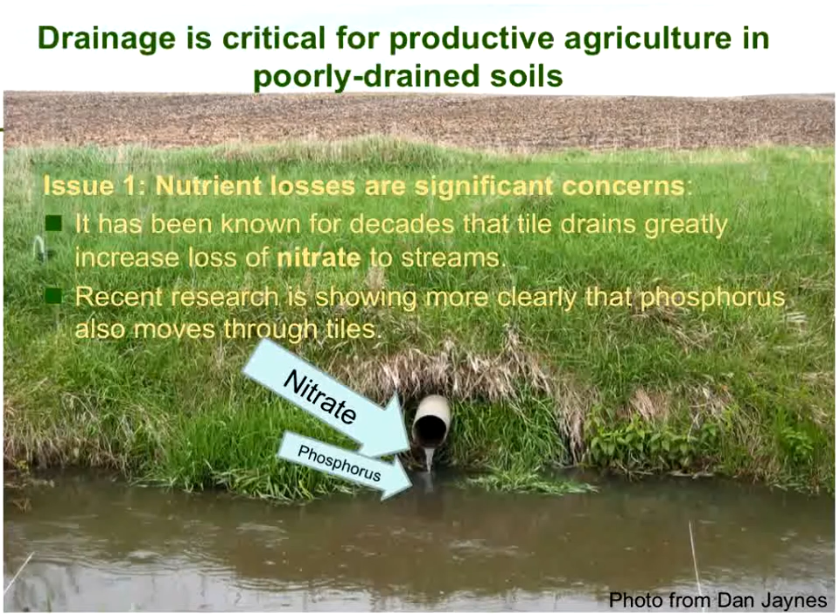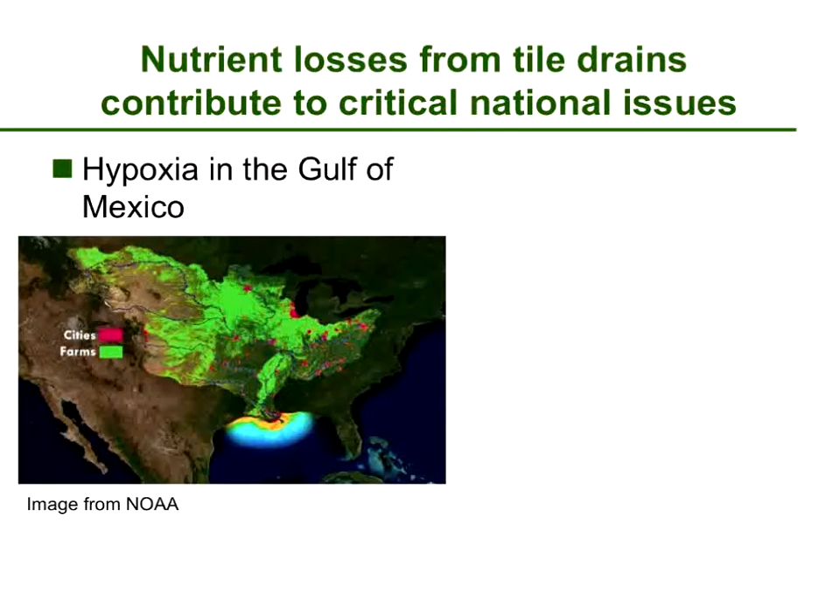More recently, the scale of phosphorus loading into tile drains has also become more widely understood. So now we really are talking about nutrients, both nitrate and phosphorus. These nutrient issues are important at the national scale, both hypoxia in the Gulf of Mexico, which is primarily a nitrate concern, although also phosphorus, and toxic algae in various lakes, but most recently in 2015, the terrible situation in Lake Erie in Toledo, where 500,000 people were without drinking water for a few days, I think shook a lot of people up and really got back to the need to really become serious about addressing phosphorus. Some portion, nobody knows for sure, but maybe something like 50%, goes through the tile drains.

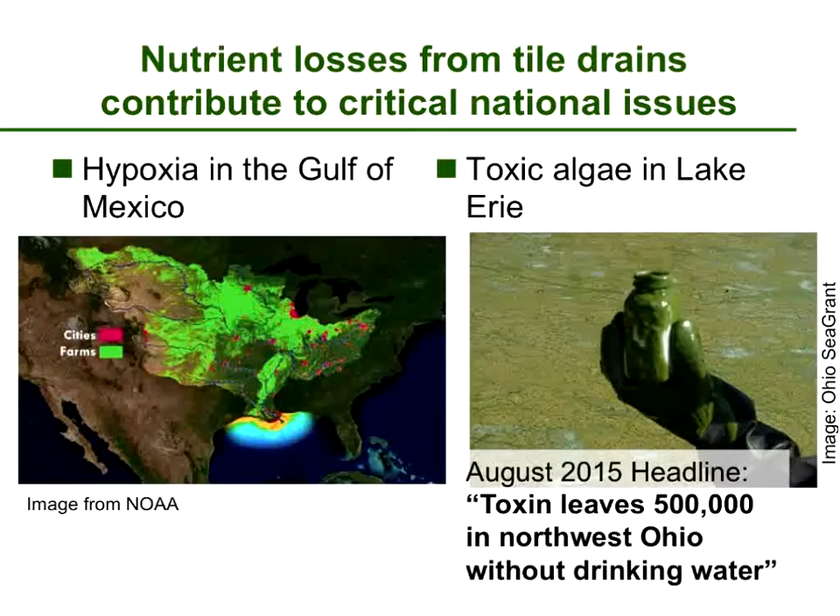Our project also addresses a second issue, which is not directly related to nutrients, which is that even in the relatively humid Midwest, crops often suffer from a lack of water. This was driven home in the drought of 2012, but water deficits occur nearly every year. And in response, irrigation has become more widespread throughout the region, even in places where irrigation has not typically been used.

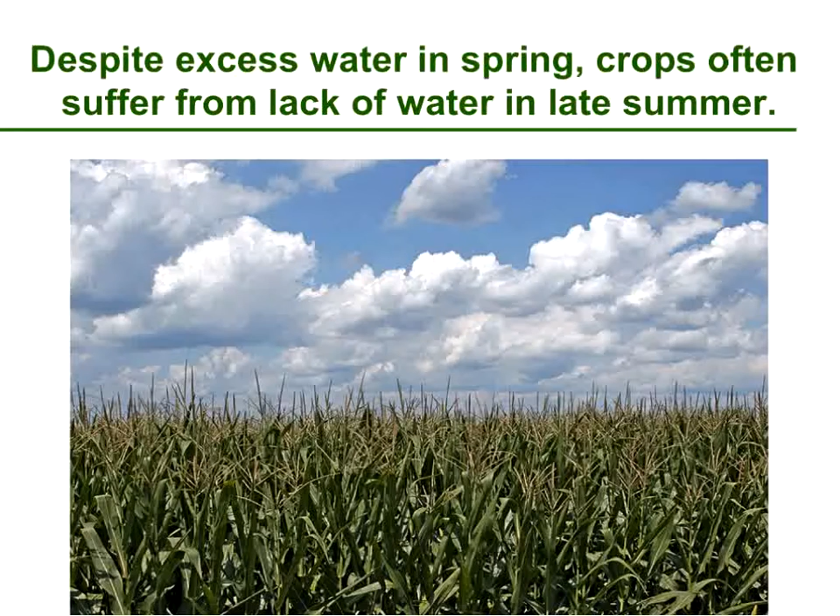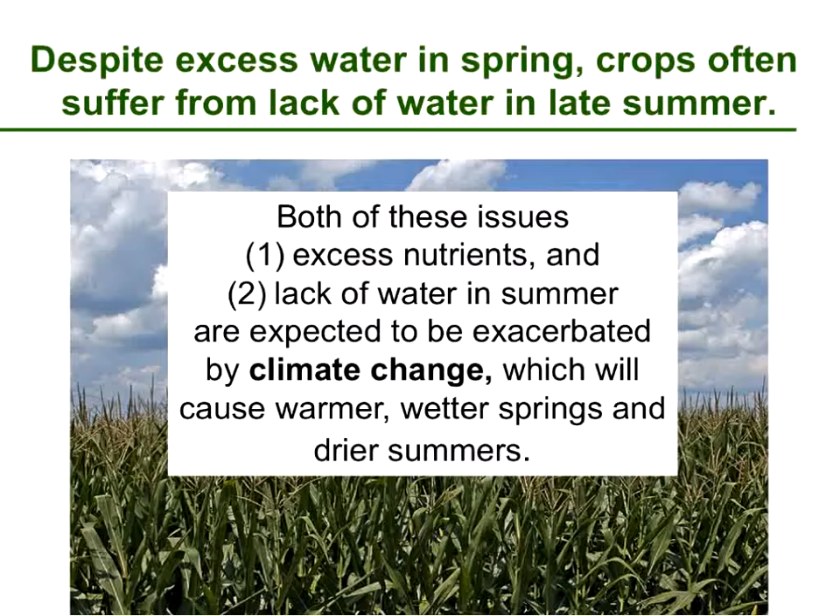Both of these issues, the excess nutrients that I talked about at the beginning and then the lack of water in summer, are expected to become worse through climate change. As we expect warmer and wetter springs, that will exacerbate the nutrient issues, and drier summers are also expected, which will exacerbate the crop water deficit.

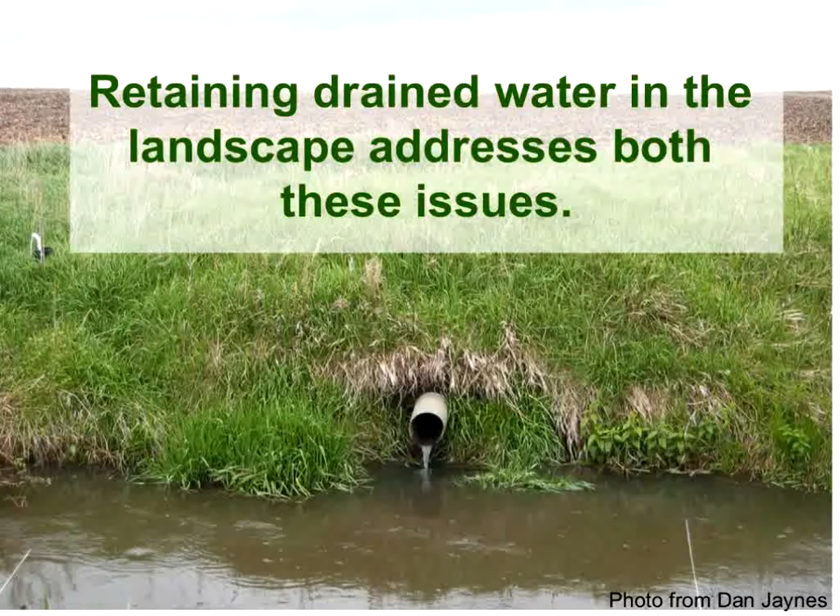So what we've been thinking about, and this group of researchers and extension folks from across the region, is the need to retain drained water in the landscape to address both of these issues. So the question is, where can you retain water in a typical field that looks like this? We've thought of a few places.

One practice is called drainage water management, and in this practice we actually retain the water in the soil of the field. I'm not going to go into it in detail because I believe Chris Hay will be talking more about some of the research that's gone on. So that's one possibility, retaining water in the soil.

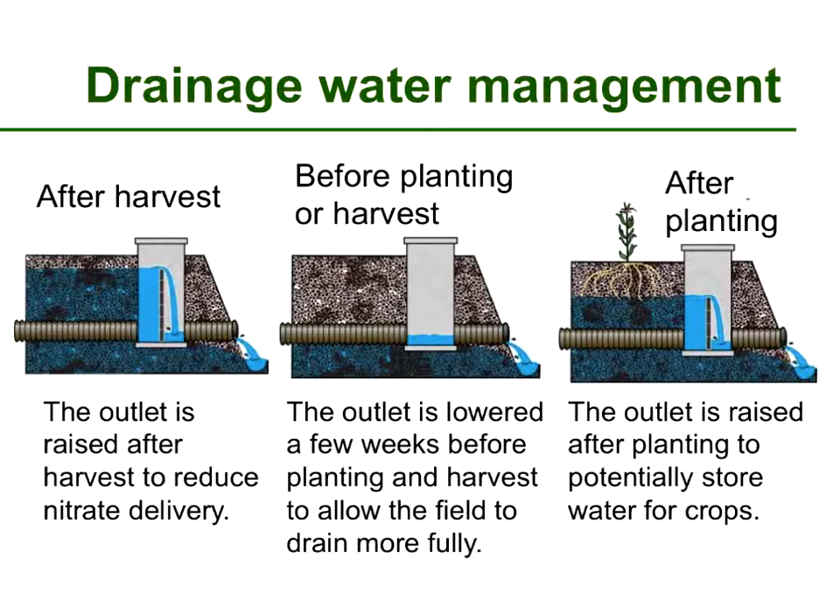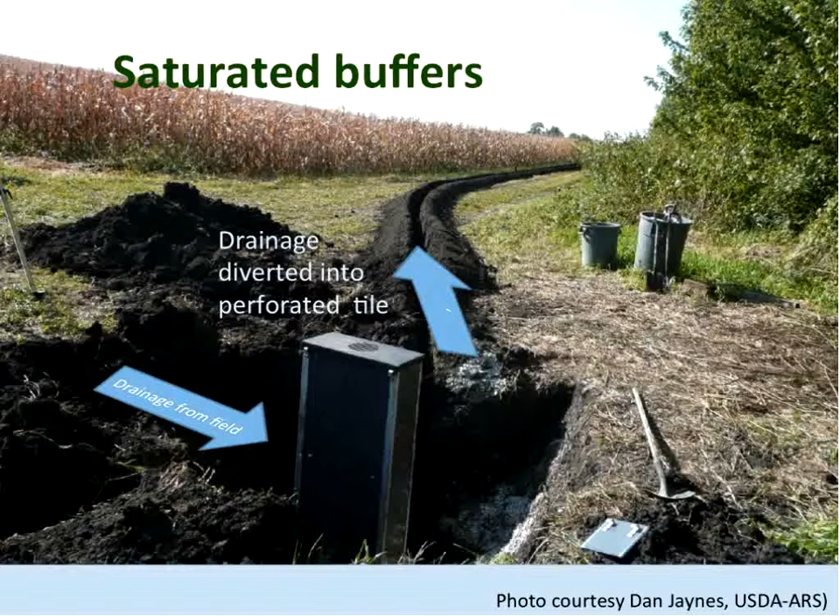Another is to retain water in the buffers, and there's a practice called saturated buffers, which is being researched across the region. So it retains water in the buffers.

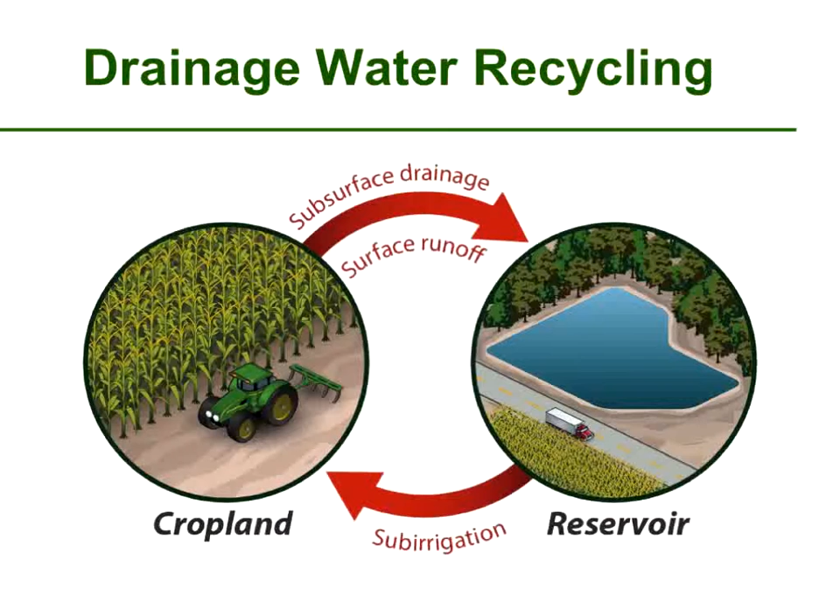And then the third practice, which is much less common and hasn't been studied as much, is what we're calling drainage water recycling. It also has a few other names. But the idea here is we have a pond or a reservoir, and the subsurface drainage and also the surface runoff are actually captured in the reservoir and then pumped back onto the cropland to be used by the crop later in the season. This is a great practice.

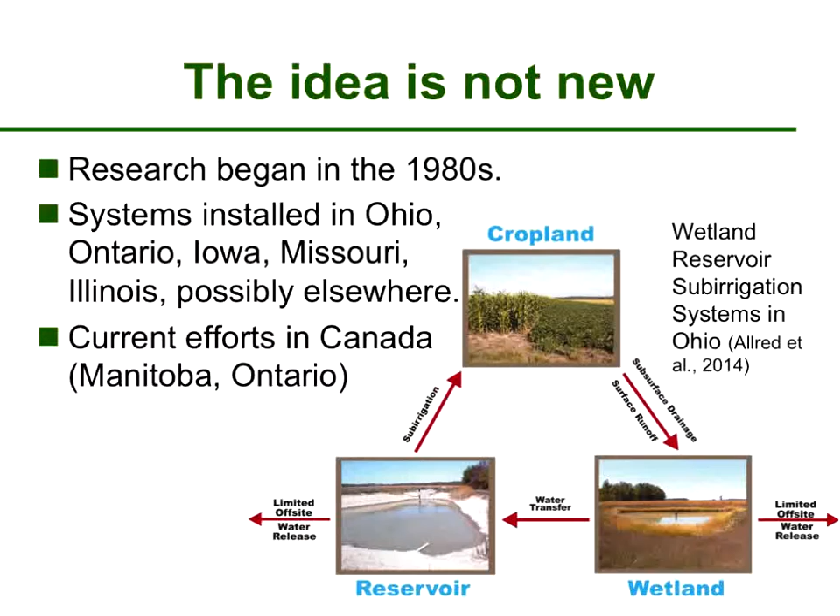It's not new. There's been research since the 1980s that have addressed that. The image there is of the wetland reservoir sub-irrigation systems that were put in Ohio in the 2000s, and there's been several papers that have published the crop benefits of those. There's also been systems in Ontario, Iowa, Missouri, Illinois, and folks in Canada are trying to do this. But those would be just one system. It really is not widespread at all.

But if these practices aren't new, one would likely say, well, what is new about this project? Although these practices have been evaluated in various locations across the region, what we're going to do in this large new project is try and bring the results together for improved decision making. The map here shows the research areas, the places where there are data, many of which have already been published, but we're going to put them in one large database, so that much more synthesis and recommendations can come out of them.

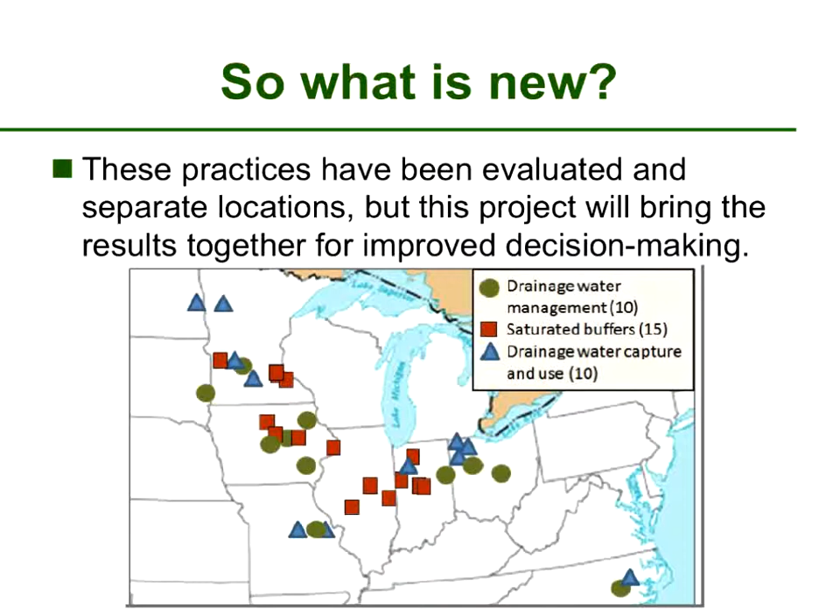So that's the big new effort that we'll be starting all across the region. It's a daunting task, but one reason we think we can do it is there's been another coordinated agricultural project going on for a little more than 4 years, called the Cropping Systems Coordinated Agricultural Project, or Sustainable Corn. Some of the data sets are already in the database, and it's taught us a lot about how to get large data sets together. So we're excited about doing more with this.

This is a diagram of what we hope to do in this project. I'll start on the left with Objective 2. We've got 30 field research sites, and out of those we'll do Objective 2, which is synthesis, working through the database. Objective 3 has a lot of modeling to extend the findings, and both of these will also look at the economics, since economic barriers are major barriers to getting these practices in place. Out of that, Objective 4 will be tools for decision making, and Objectives 5 and 6 are extension and then education for graduate students and teachers.

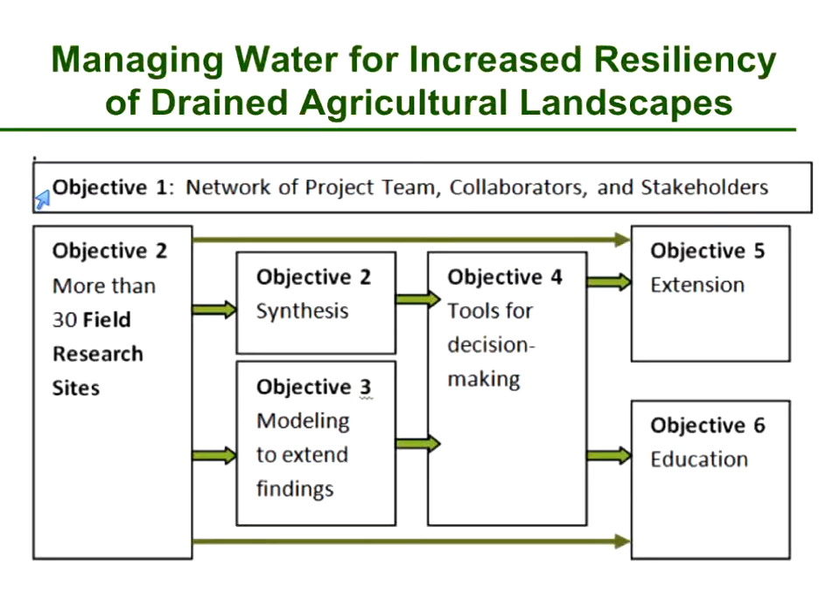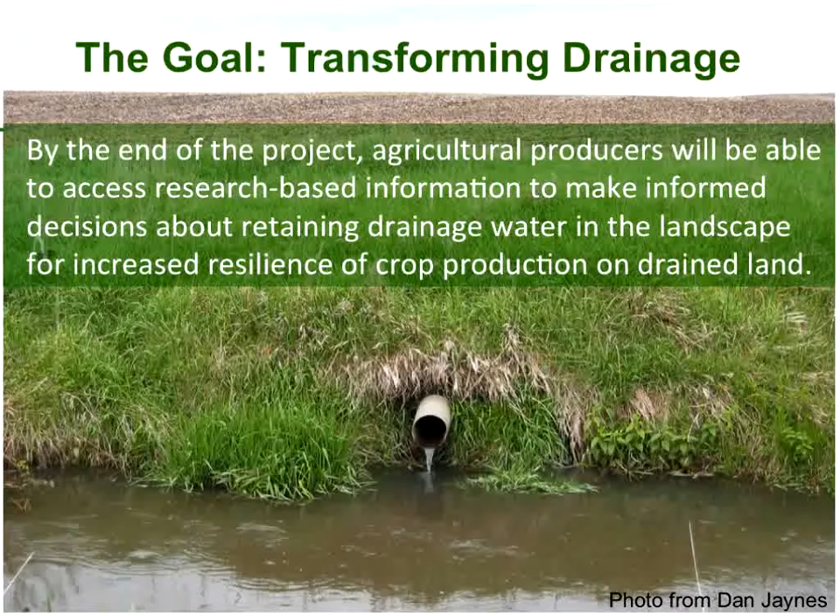So that's the goal: nothing short of actually transforming the way we do drainage. Our short-term outcome is that by the end of the project, producers will be able to access the research-based information they need to make informed decisions about retaining drainage water in the landscape, which should lead to increased resiliency. A longer-term vision, probably beyond the scope of this project, is that the process of designing and implementing agricultural drainage will actually be transformed so that water retention in the landscape is at least considered every time a new drainage system is put in.

And so once again, the nitrate and phosphorus losses having such a negative effect on our streams and rivers—that nitrate and phosphorus can go back onto the tile drain and back onto the crop field, and although it might still come out through the tile, it can be eliminated from our rivers and streams. So Chris Hay is going to talk about one of those practices, and Richard Cooke will talk about another related practice, which will give you more information.

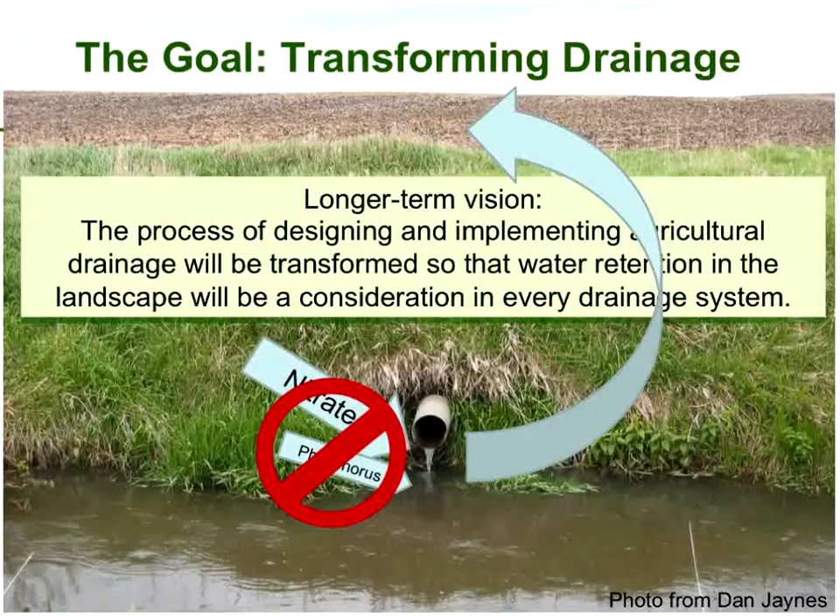Chris Hay is an assistant professor and extension water management engineer in the Department of Agricultural and Biosystems Engineering at South Dakota State University. His research, teaching, and extension programs focus on agricultural hydrology and water management, including studying impacts of subsurface drainage on hydrology and water quality in transitions from subhumid to semi-arid climates, and impacts of drainage and cover crops on evapotranspiration. His extension programs focus primarily on drainage, irrigation, and water quality, and he has recently led a program to train NRCS staff in the North Central region on drainage water management. Thanks, Chris.

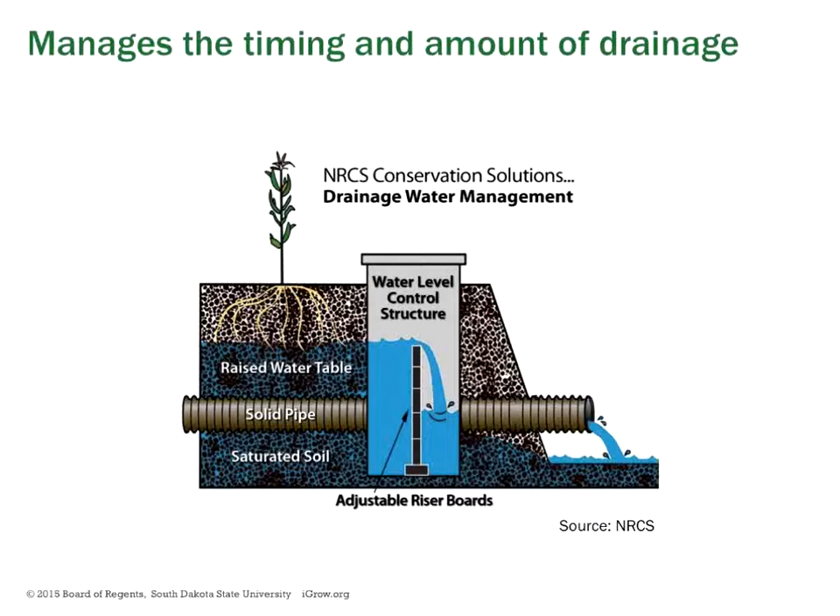One concept coined by Wayne Skaggs, one of the preeminent drainage researchers in the U.S., is the golden rule of drainage: we should drain only what's necessary to ensure trafficability and good crop production, and not a drop more. Drainage water management fits right in with this golden rule by actually managing drainage instead of just allowing it to occur anytime the water table rises.

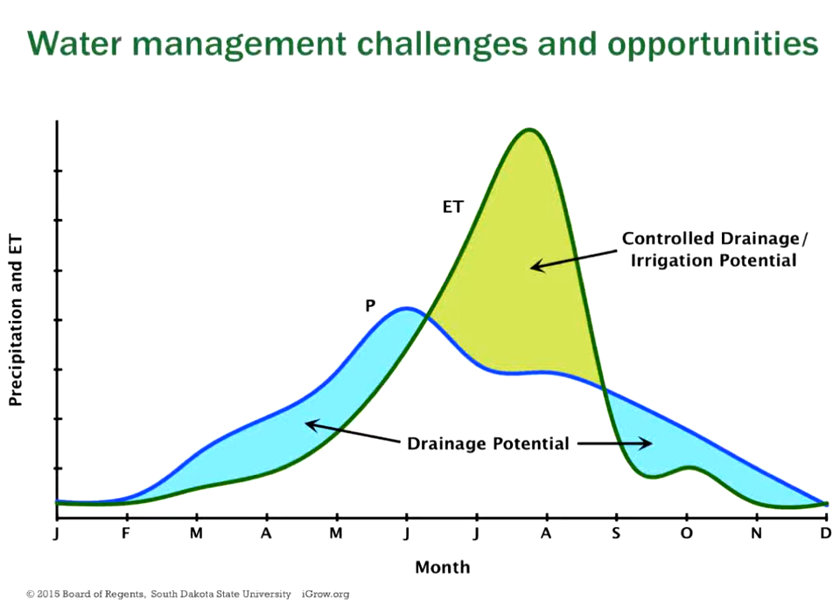Drainage water management allows us to manage that drainage to better address both the excess and deficit water conditions.

Another important concept is that drainage water management only manages the drainage outlet, or the amount of drainage we let leave the field. We've got water entering the system as precipitation, a large amount leaving as evapotranspiration, some going to deep seepage, some running off the field, and some leaving via drain flow—but only drainage is the component addressed by drainage water management.

So although you may hear about controlling the water table with drainage water management, that's only true if we've got enough water in the system to have a water table to control. If precipitation isn't enough to raise the water table, drainage water management won't have any impact. If we want to actually raise the water table in that situation, we've got to supply water through sub-irrigation to make that happen.

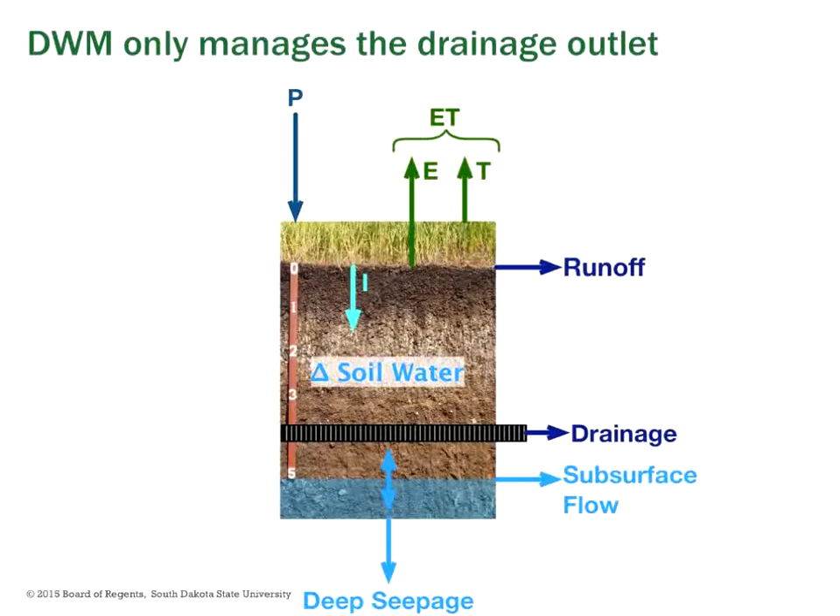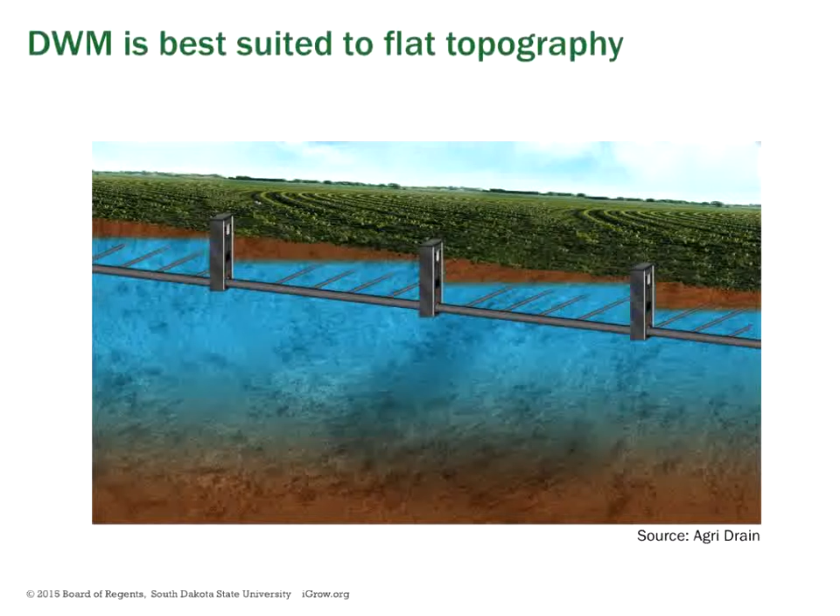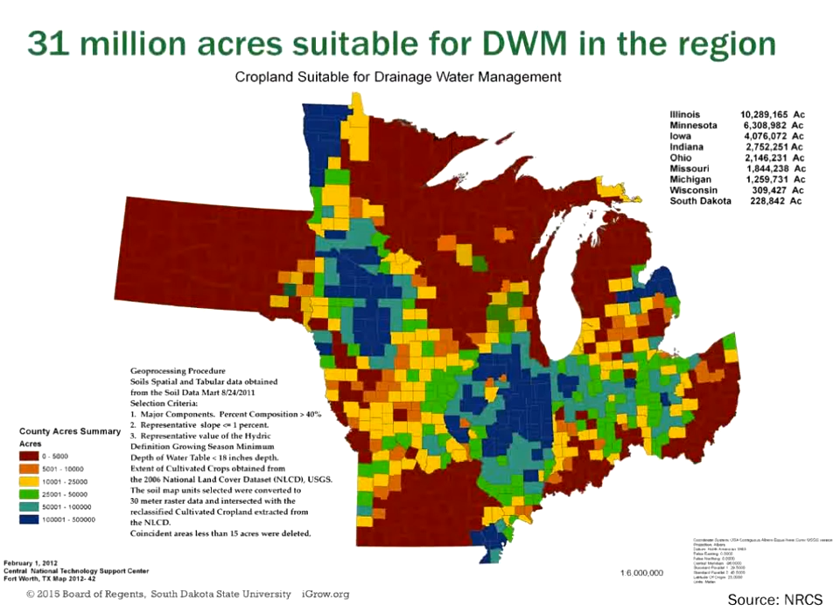Another limitation is that it's really limited to situations of flat topography. If we get more slope, we lose that ability to manage, and we can deal with that somewhat by introducing more control structures, but at some point that gets impractical. So we talk about a 1% slope or less as where this is really applicable. But that's still a large area of the north central region that lends itself to this practice, about 31 million acres by this estimate that would be suitable.

When we look at some of the results of the research on this practice, this comes from an article summarizing a 5-state CIG project in the Midwest, as well as results from other areas where this has been researched. Overall what we see is a reduction in the drain flow, the amount of water leaving the field via drainage, ranging from 18 to 85%.

When we look at the impact on nitrate losses, another thing that's been pretty consistent from the research is that drainage water management has little or no impact on the actual concentration of nitrate leaving with the drainage water. So really the reduction in nitrate loading leaving the field is primarily from that reduction in drain flow, and the reduction in nitrate load pretty well matches the reduction in drain flow. So 18 to 79% is the range of nitrate load reductions we've seen from the multiple sites that have looked at this practice.

This practice hopefully benefits the environment, but also potentially has some benefits to yield or production. Summarizing the research done on this practice, when we look at the impact on yield, there's been several cases of yield benefits or increases because of the ability to conserve some water at times. That's ranged from 1 to 19%, although those yield increases tend to be fairly modest, more like 1 to 5%, up to 10% in some cases. But in many cases there's no real effect on yield, and a lot of that just depends on the timing of rainfall.

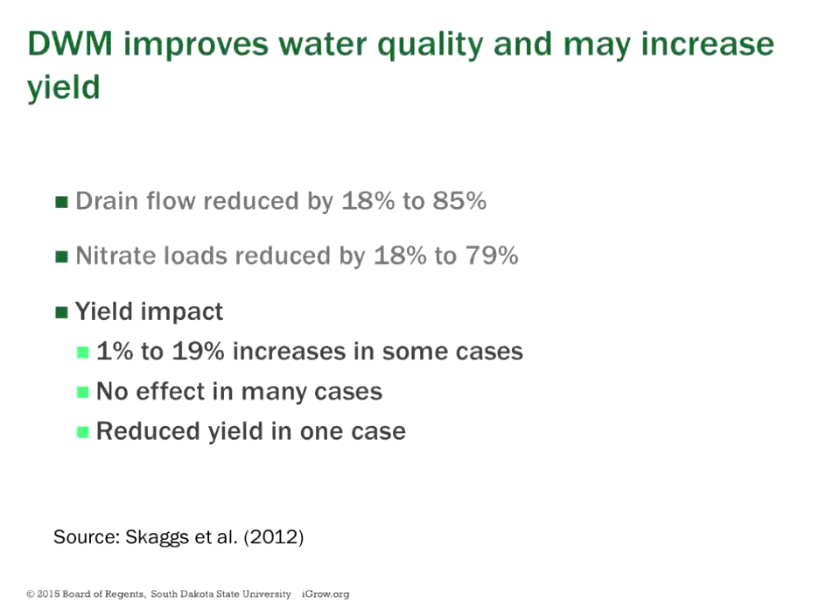If we look at how the practice is typically managed, there are certainly different scenarios that can be used; this is just one typical scenario. Once the crop is harvested in the fall, we would put some of these weir boards, risers, or flash boards in the control structure to raise that drainage outlet. Then the water table would have to rise all the way to that level to actually flow out of the system as drain flow.

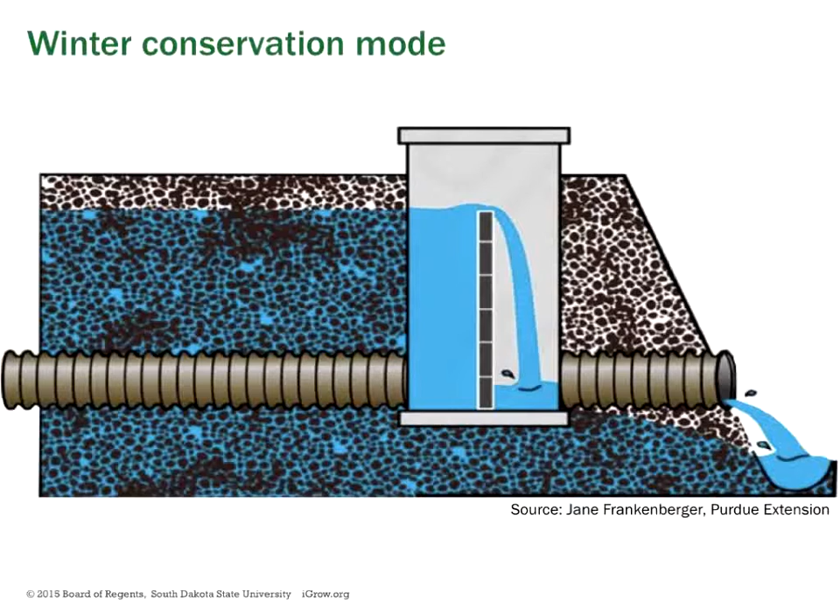Once harvest is done, drainage really isn't needed in the field, so we can put those risers into the control structure and hold back any water that occurs over that non-growing season when drainage isn't needed. By holding back that water, we hold back the nitrate that would leave with it, reducing the amount of drain flow and the amount of nitrate leaving with that drain flow. Typically those boards would be placed within 6 inches of the soil surface, or maybe about a foot below it, raising up near that soil surface to hold back as much water as possible over that non-growing season.

And then in the spring, when the drainage is needed so that the producer can get out in the field for spring operations and planting, then we would pull those boards, turn it back into basically conventional drainage mode, where we would lower that water table all the way down to the tile elevation, let that system drain out, and let the field dry out so that we can get in a timely fashion and do those spring operations.

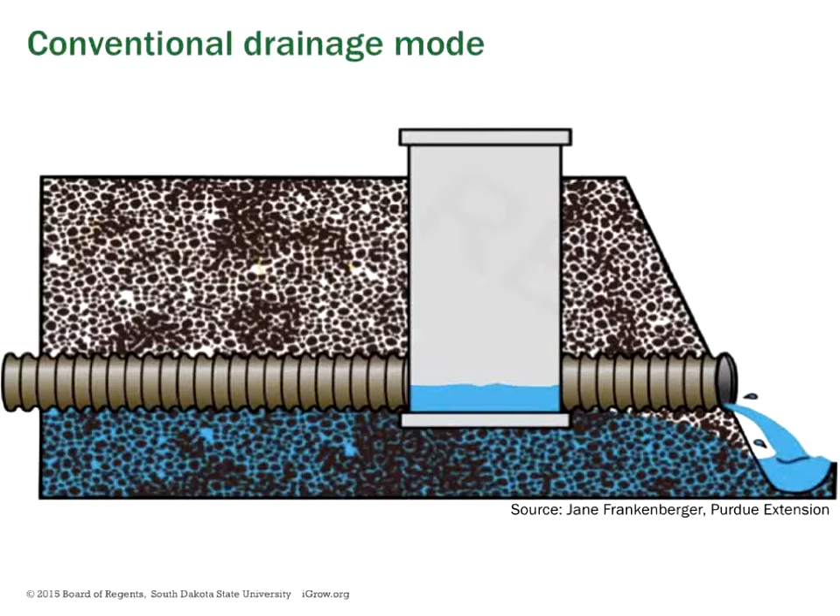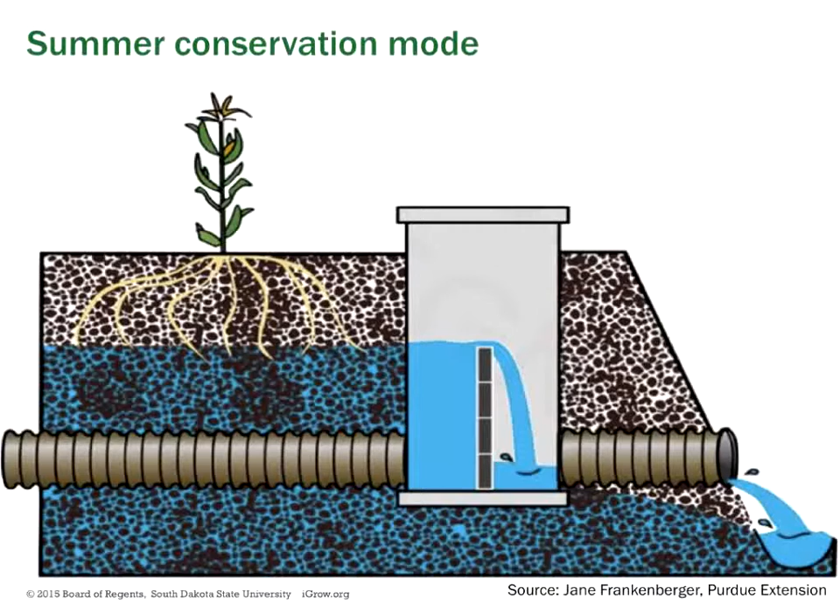And then allowing a little bit of time for some root development and to get the crop started, then we could put another set of boards back into that system to raise that outlet elevation. In this case, a typical level may be 2.5 feet below the soil surface, building in that capability that if we do get some timely rainfall, we can capture and store some of that water in the field and make it available for that crop later on in the growing season.

Again, that's just one scenario. There are other scenarios depending on the goals of the producer as well as climate and other issues.

But if we look at that throughout the year, kind of starting at the beginning, coming off of the last growing season, we've got those boards in the field to hold back that water, reducing drain flow and reducing nitrate loss with that.

Then in the spring, when the drainage is needed, we lower that outlet, let the system drain out, get in and do our spring planting and other field operations, put the boards back in, with the idea then of potentially conserving some water, which also will reduce nitrate losses, but also save some water for the crop to use. Then when fall comes around, if we need some drainage prior to harvest, we can pull some boards and allow that to happen.

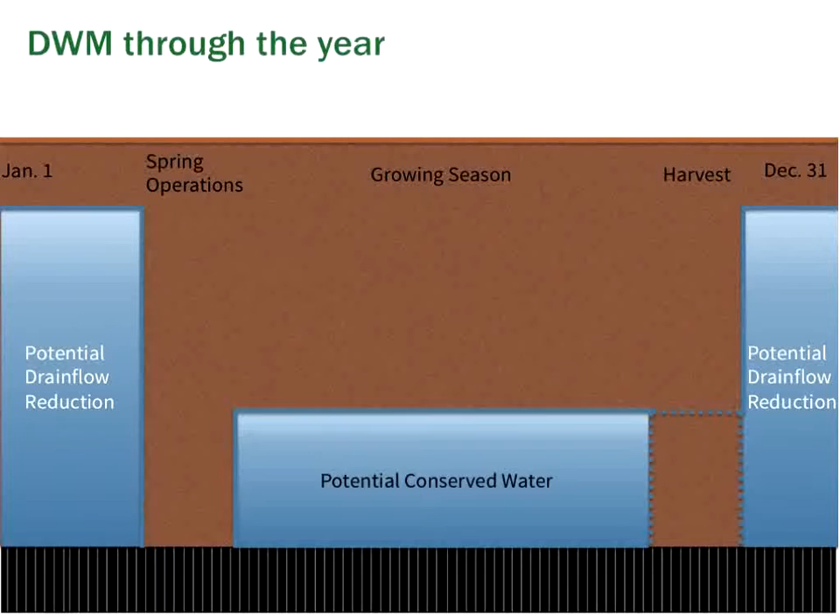If we don't need the drainage, then we can just leave the boards in. And then again, once harvest is over, put the boards back in to hold that water and potential nitrate loss back. But again, that's just dependent on the outlet elevation.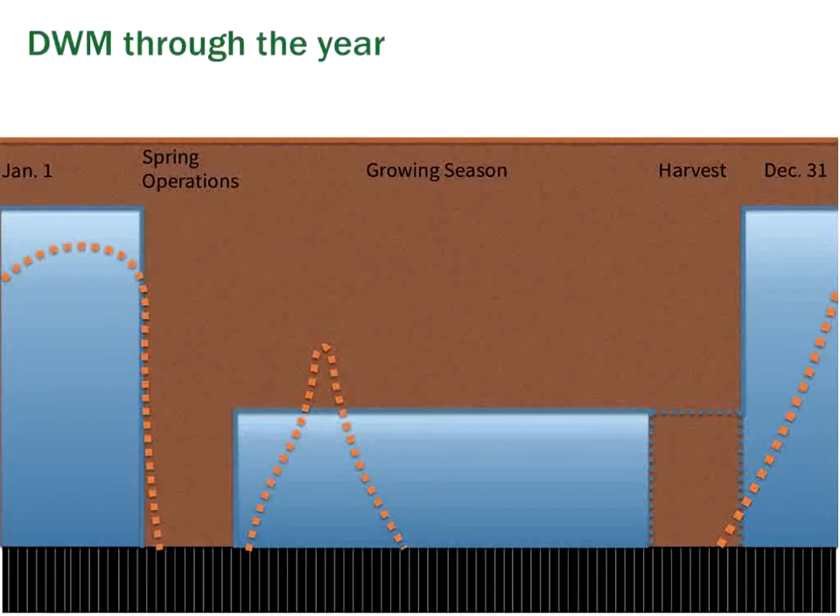In this case, we actually show it coming up a little bit over that, so we would still have some drainage to get it back down to the elevation we set. But then as we move into the meat of the summer, evapotranspiration exceeds precipitation enough that the water table drops and we're no longer controlling that water table. And then we show some water starting to build up in excess in the fall after the crop is harvested.

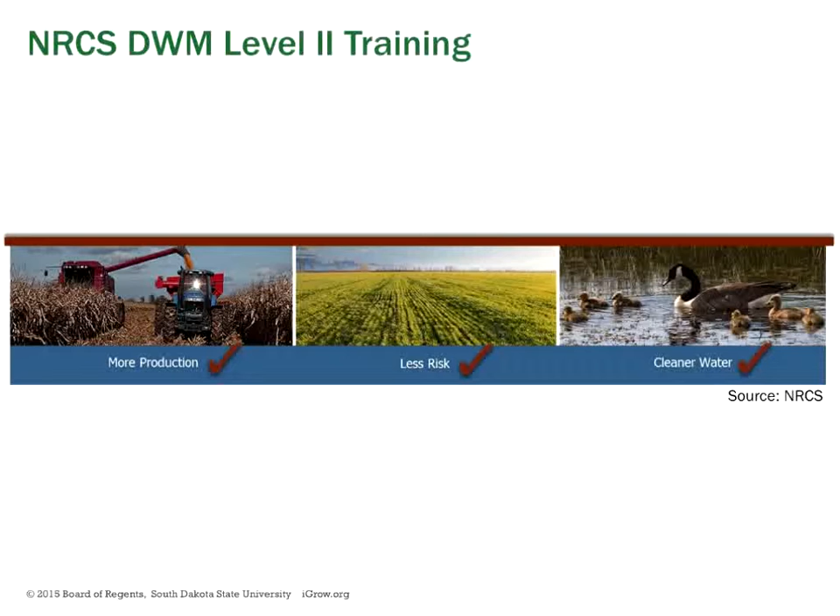This has become a priority practice from NRCS because of its potential for both reducing nitrate losses and improving production. It's a focus of the Ag Water Management team within NRCS, and I see some of them have joined us. One of the things we've partnered with NRCS on is doing some training for those employees. It's been a hybrid approach, with a number of online modules developed to address this practice and some related practices.

There are 8 of those modules out there, available for folks who'd like to view them and learn more about this practice as well as some of the related practices. They're available at the forestrywebinars.net site. It's probably easiest to just go to that site and search for drainage water management, and you'll find those online modules.

We also did a series of on-site training sessions with those employees across the 10-state North Central region, training just under 600 employees in that region.

Another thing we'll be doing as part of that project is our own upcoming webinar series, hopefully starting next month. Here are some of the topics we'll be covering, and we'll certainly be getting the word out through the North Central Region Water Network as well as other outlets. So again, if it's something you're interested in, keep your eye out for those webinars.

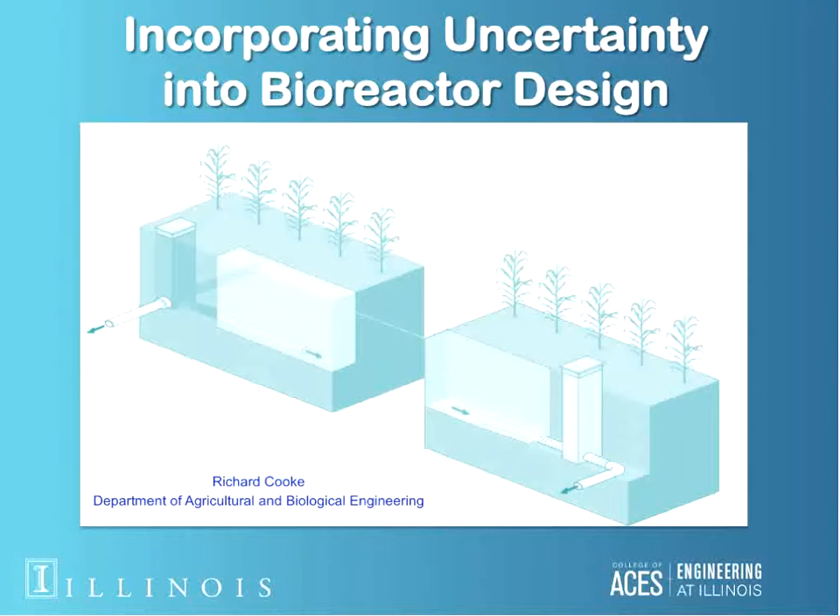Thank you very much, it's indeed a privilege to be part of this webinar. I won't spend too much time on the effects of nutrients on the hypoxic zone, since that's well known to this audience. I'll just say that we're developing subsurface bioreactors for use in the Midwestern region, which is heavily tiled, to deal with some of these nutrient loss problems.

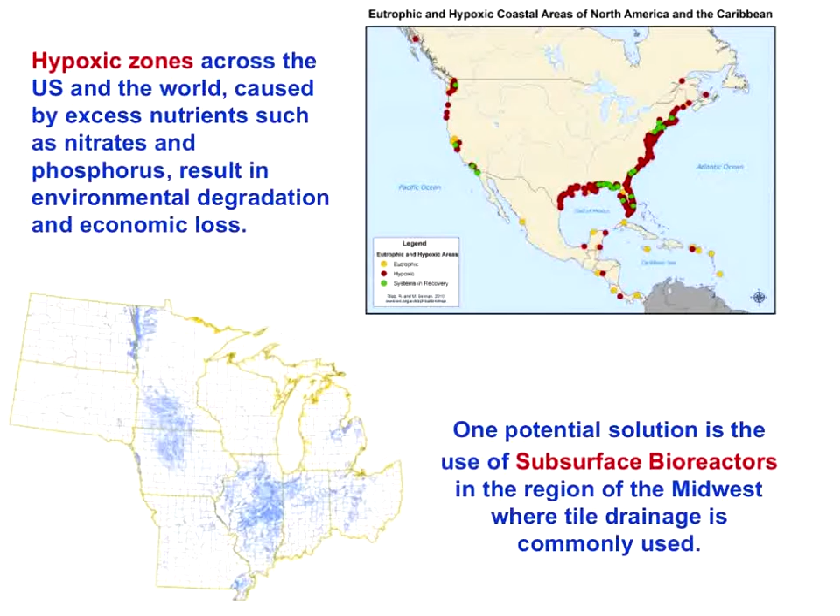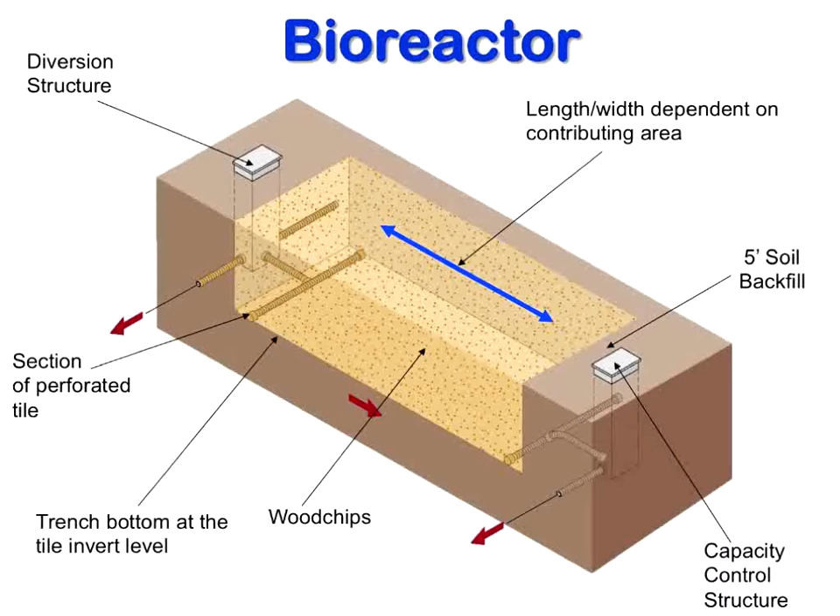A bioreactor is essentially a trench filled with wood chips through which tile water is diverted, treated, and then passed back into the system. It consists of a diversion structure as well as a capacity control structure. This is a top view of the bioreactor.

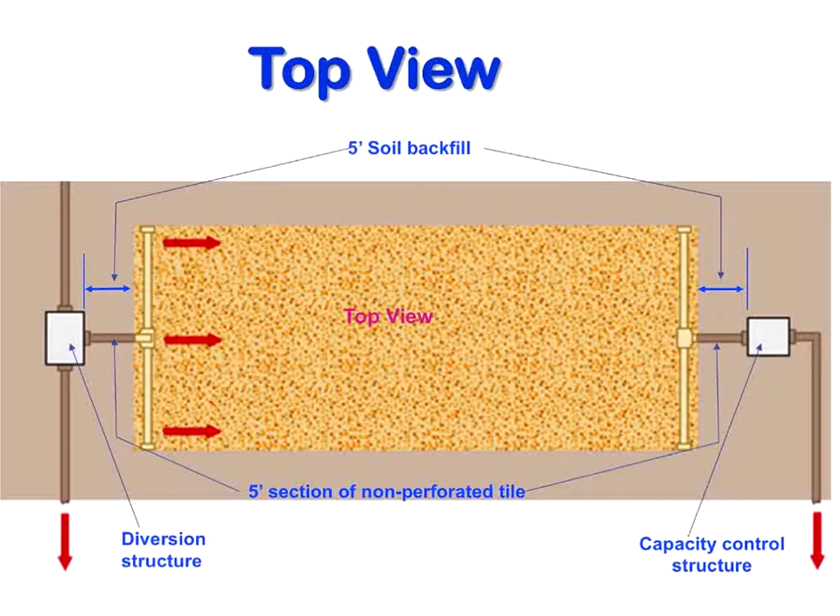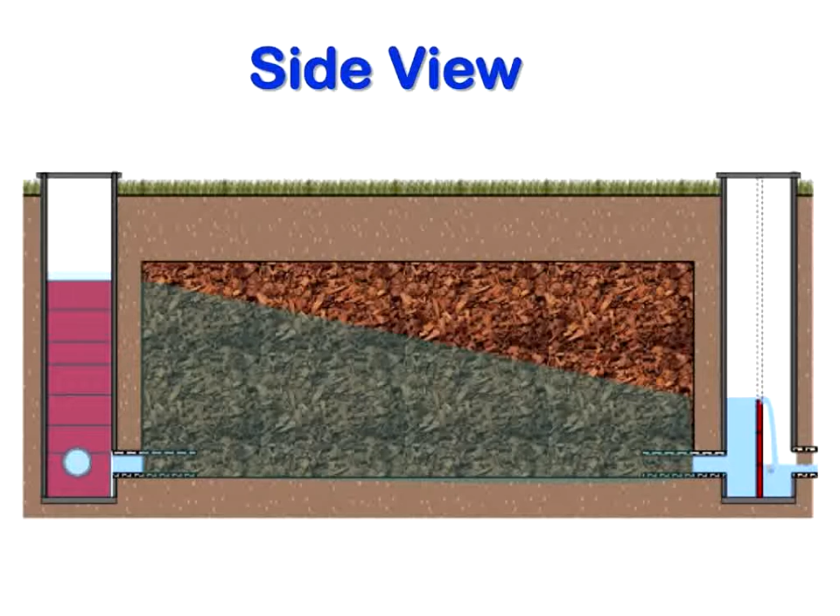Water flows through the medium. The two ends aren't connected hydraulically, it's just flowing through the medium. From a side view, the flow is controlled by the level of the stop logs or weir boards in the diversion structure and the capacity control structure. The distribution isn't necessarily linear, but this is probably the best approximation we can show of the process.

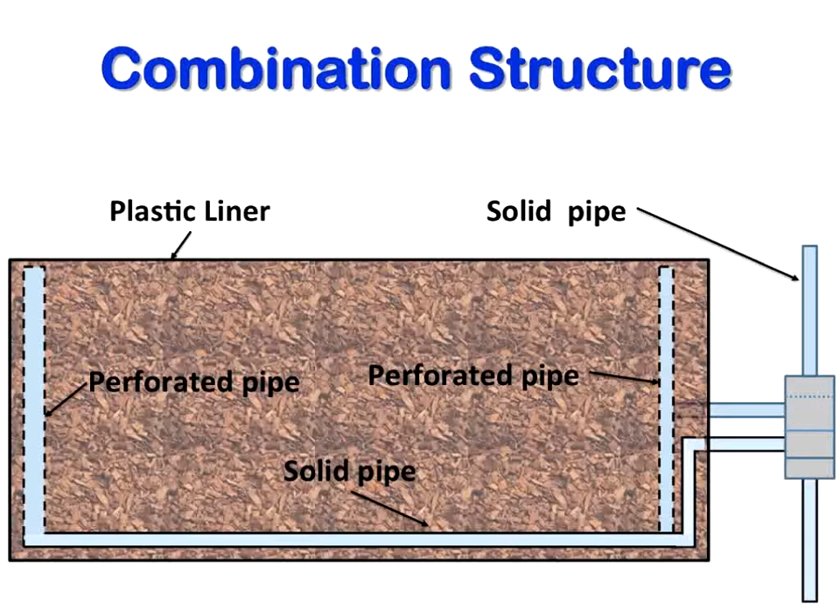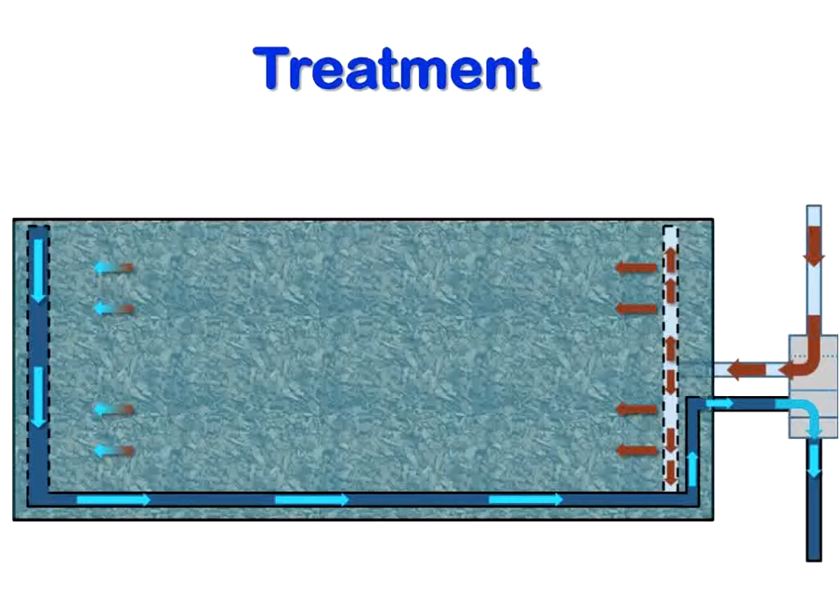We also have structures where the two control systems are combined into one structure, with a chamber that causes diversion into the bioreactor, and another chamber through which we can control capacity. These are easier to install, although they can't be used if the structures are too big, or if the area treated is too large.

In designing these bioreactors, there are several factors that lead to uncertainty in performance. One is the use of a soil cover. In certain areas a soil cover is put on top of the bioreactor, which reduces the hydraulic conductivity of the flow through the system, so the flow will be less than the design flow. If necessary one can be put on, but otherwise there's no need for a soil cover if, say, the bioreactor is at the edge of the field in a filter strip, since these systems have a very small footprint.

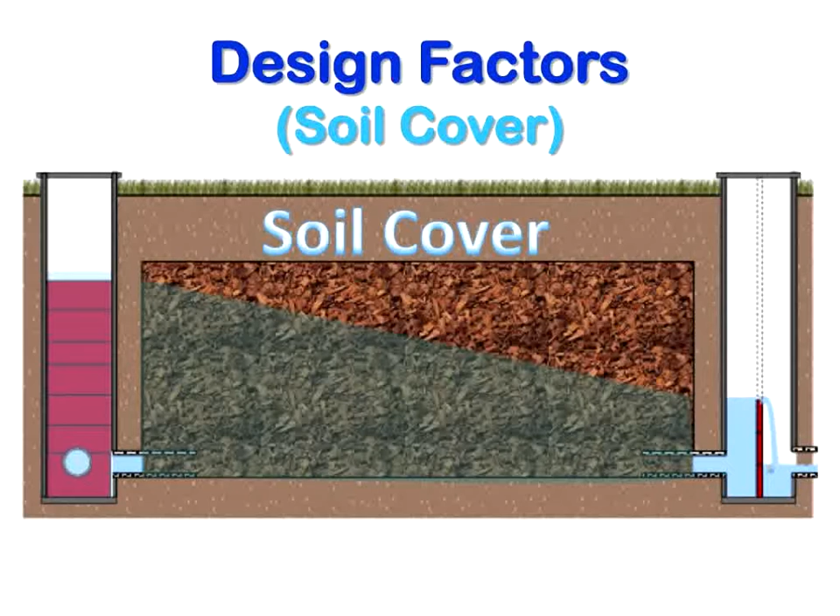Another factor is conductivity. In designing systems we usually use a conductivity value from the literature. If we can determine the conductivity from a particular batch of wood chips, we'll have less uncertainty in the use of the system.

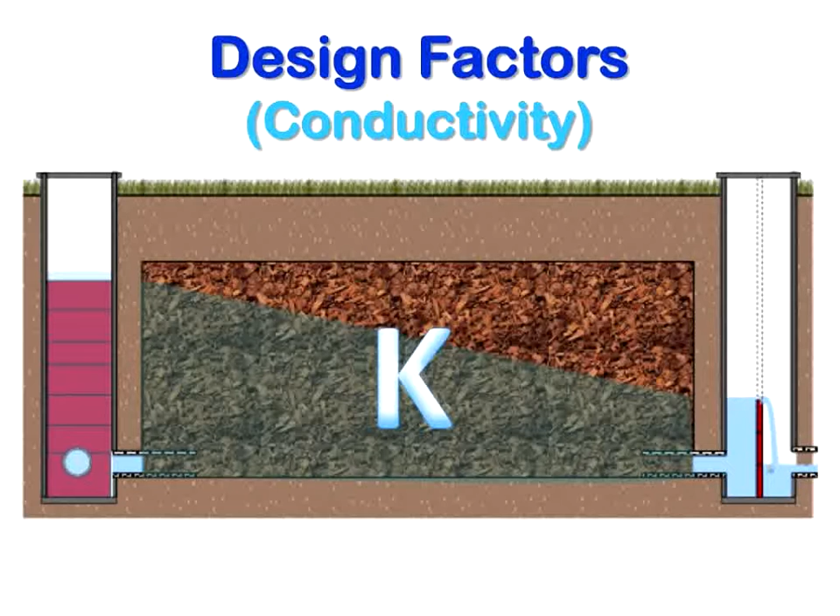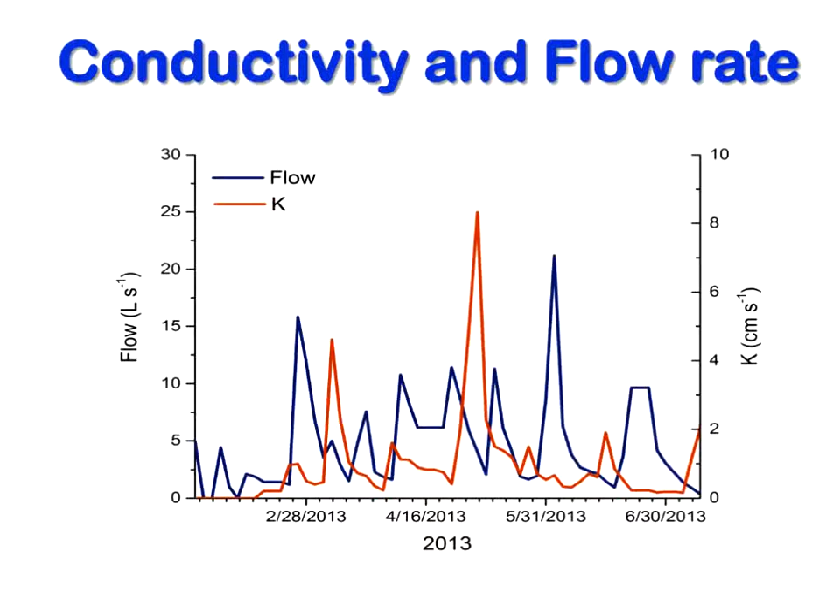We also use a constant conductivity value. However, our research has shown that the effective conductivity in the bioreactor is not constant—it decreases over time, and when there's a spike in flow the conductivity increases again, then falls back down. We think this is due to the formation of biofilms on the medium inside the bioreactor. Indeed, looking at the cross-correlation coefficient, we found a strong correlation between the conductivity and the flow six days prior to that event.

So it's possible to develop some kind of model, say a Markov chain model, and treat the conductivity not as a constant but as a variable. This will reduce our uncertainty in the results.

There's also the residence time, which is controlled by the level of the upstream and downstream stop logs. We can increase the residence time by decreasing the difference between these two heights. But if we increase the residence time, we decrease the flow through the system, creating greater potential for bypass flow in the bioreactor. So we need to determine the optimum board settings to get the optimum performance of the bioreactor.

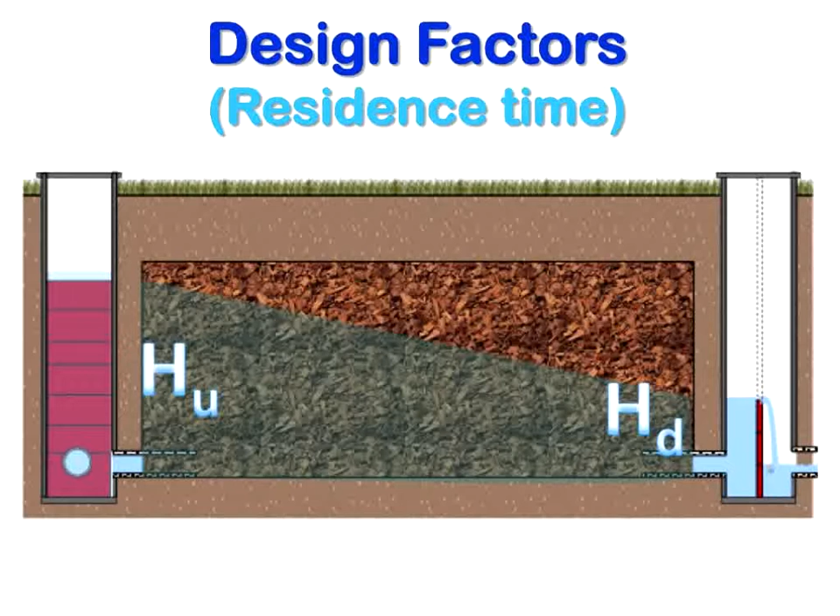In the model we've developed, there's room for adjusting the settings to determine what the optimum settings would be in the system.

If we want bioreactors to be used more widespread and to be used in things like water quality trading, there is a need to reduce or identify any type of adverse effect and deal with them. We have looked at some unintended consequences of bioreactors.

For example, we find that almost invariably there's a slight increase in the dissolved reactive phosphorus coming out of the bioreactors. This is especially true when the bioreactors are new, for the first few months. Although the values are small, in this case less than 0.4 milligrams per liter, it's real and it happens almost every time, as you can see from most of the literature. People are working on ways to reduce this phosphorus, either by adding medium to the wood chips for phosphorus removal, or adding a separate chamber for phosphorus removal in some of these systems.

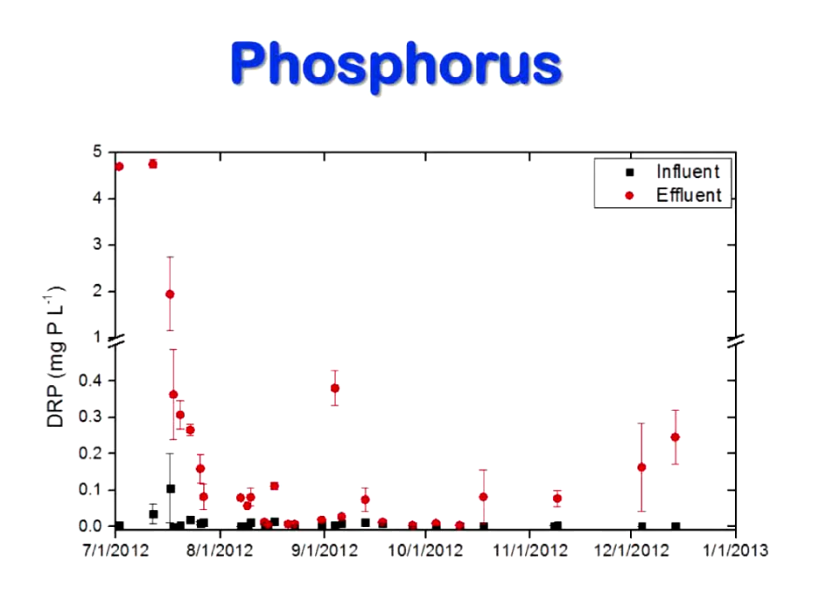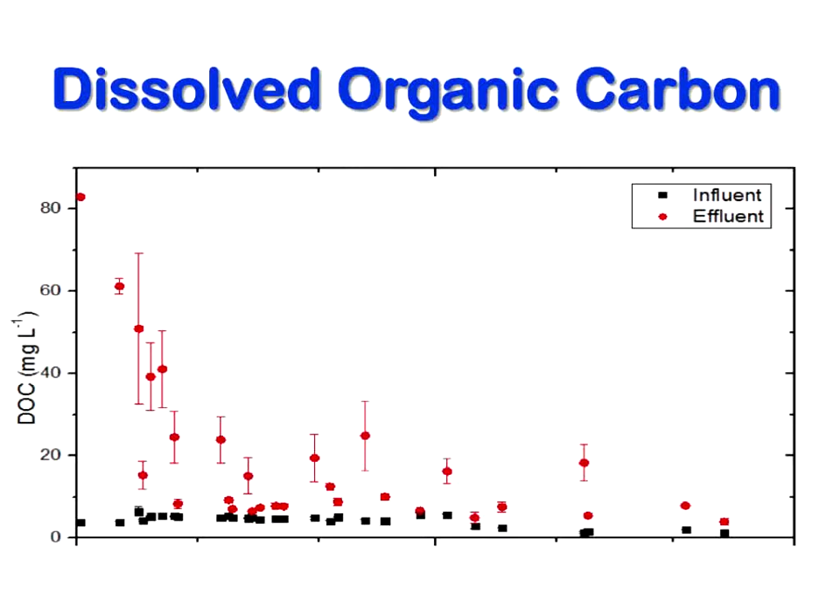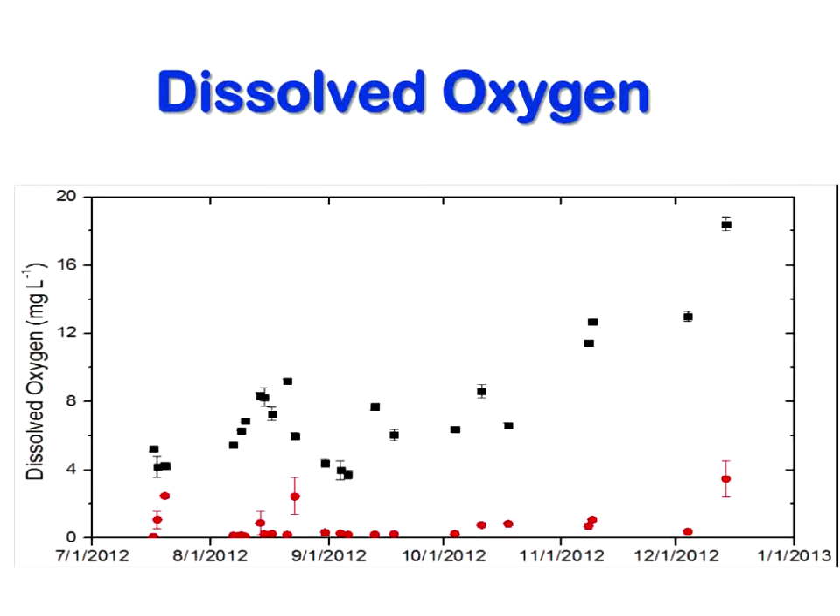We also looked at dissolved organic carbon, which increases particularly in new bioreactors and then settles down, but it's usually more than the inlet dissolved organic carbon. And of course, the dissolved oxygen is usually down close to zero. The combination of high DOC and low dissolved oxygen can have some adverse effect inside the receiving stream, so we have to be able to model this effect. It's particularly important if we're thinking of scaling up this system so that we have a whole host of bioreactors out in the landscape.

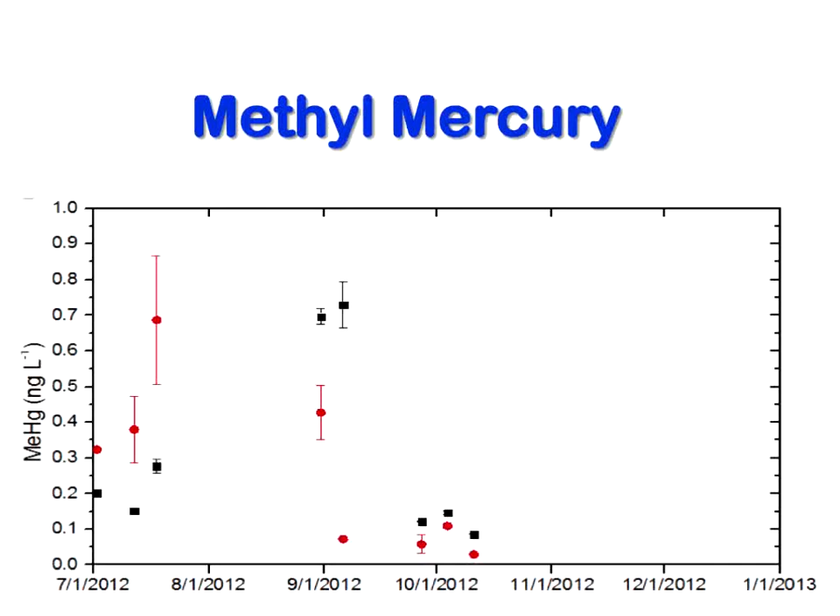And methyl mercury: with our redesign of the system, we have addressed the methyl mercury problem, and indeed in most of the instances where we measure now, the methyl mercury coming out of the system is less than the methyl mercury entering the system. So we think that problem has been licked, and in any case the levels are rather low—here there are less than 1 nanogram per liter. The background level in natural systems tends to be on the order of 0.4 to 2 nanograms per liter. So it seems that it's not a major problem.

Now, we also have to make sure that our results can be replicated and that we can predict how the systems will perform if we're moving from one part of the region to another, or to another part of the country. When we looked at bioreactor performance, we measure it either in terms of percent nitrate load reduction or nitrate removal rate. It seems that nitrate removal rate is a tighter measure of performance, in that the variance or stochastic component of the relationship between temperature, retention time, and removal rate is less than if we look at load reduction.

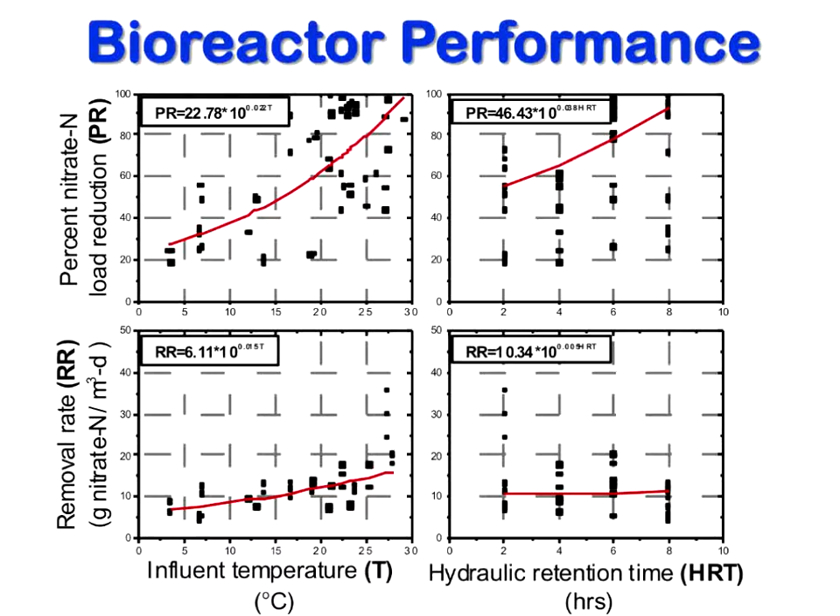The models which we have used, and that I have developed, have looked at the percent load reduction, and we're going to redo these models to instead look at the nitrate removal rate, especially if we can incorporate the effect of temperature on removal rate. And if we know the water temperature, we can do this.

The soil physicists say we can predict the soil temperature at any depth, in any location, with reasonable accuracy. However, the water temperature of the water coming out of the tile at a given depth is not the same as the soil temperature. So to reduce the uncertainty, we have to develop models so that we can predict what that water temperature would be.

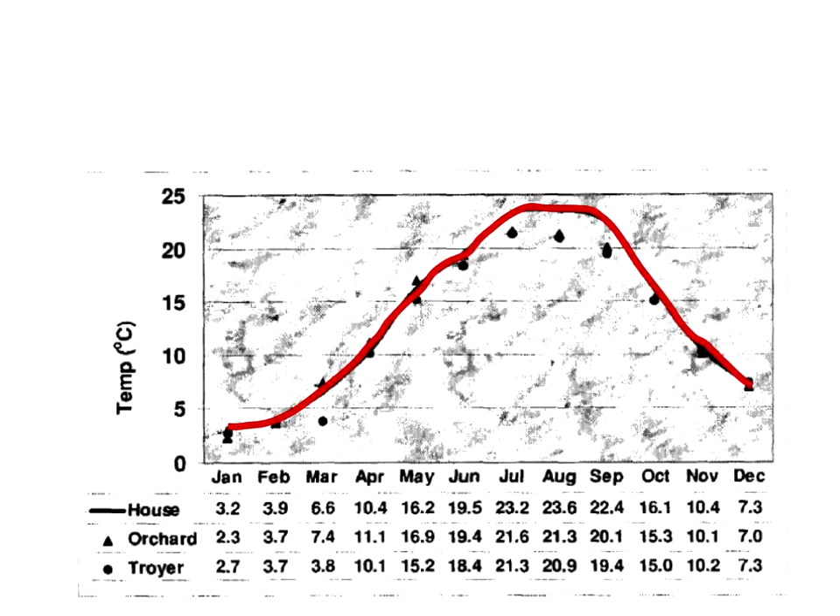We have done some work on using solar energy, both active and passive, to increase the temperature in bioreactors, and we have achieved some modest success—we've increased it by between 0.6 and 2 degrees Fahrenheit. But there's much work left to be done, and this is one thing we are going to be looking at over the next year or so.

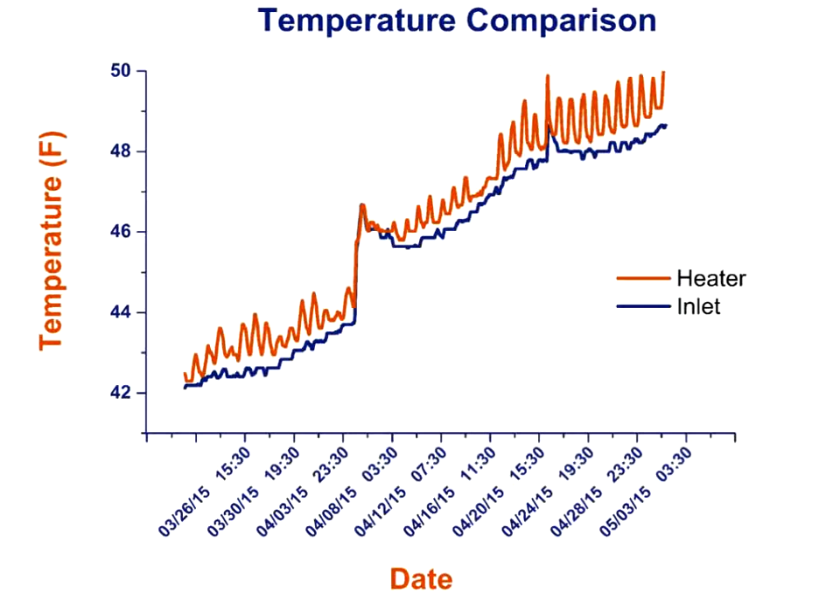If I could make some recommendations based on what we have learned about how we can reduce uncertainty in bioreactors: one is to incorporate a variable hydraulic conductivity, because that's what occurs in the system, and it's not hard to do—a simple Markov chain model will be able to achieve that.

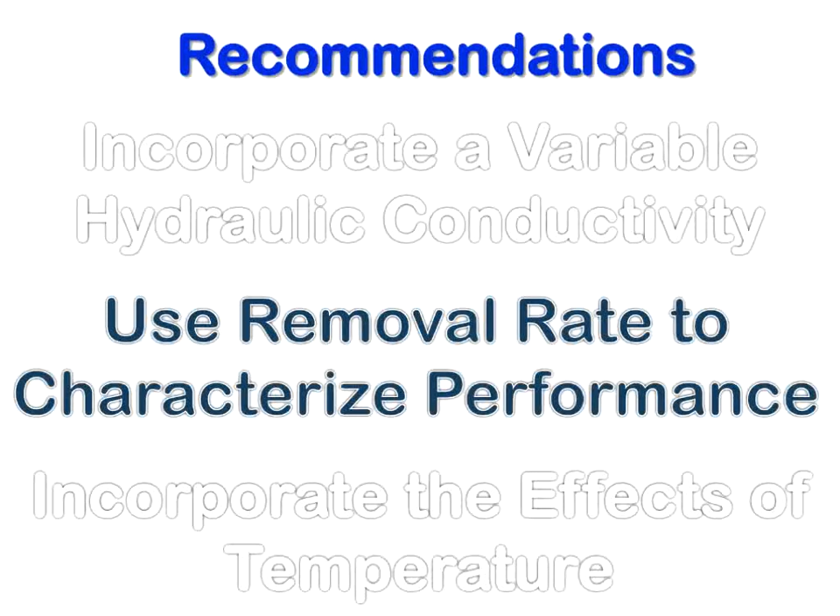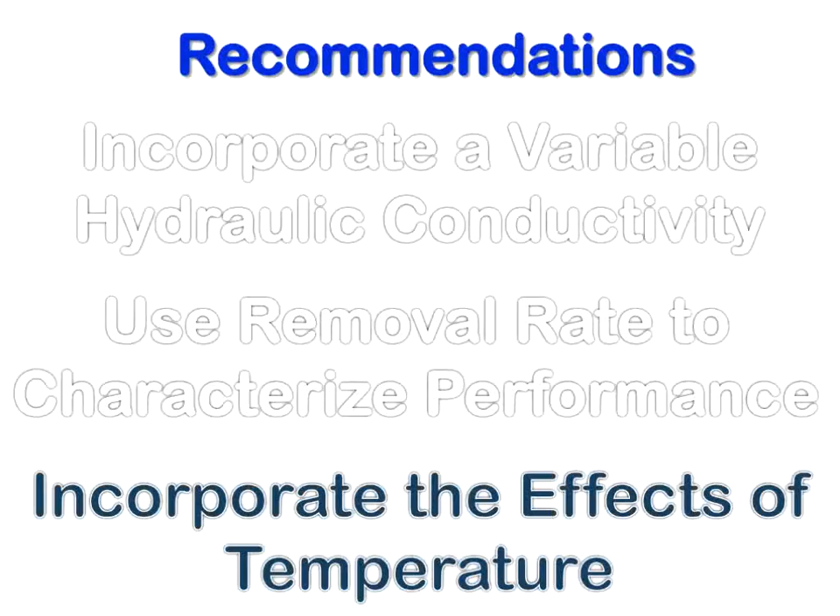And if we can use removal rate instead of load reduction to characterize bioreactor performance, then we can produce results which would be more transferable and more predictable. And lastly, if we incorporate the effects of temperature, we would further reduce the uncertainty in our bioreactor systems. Thank you very much, and I look forward to any questions you might have.